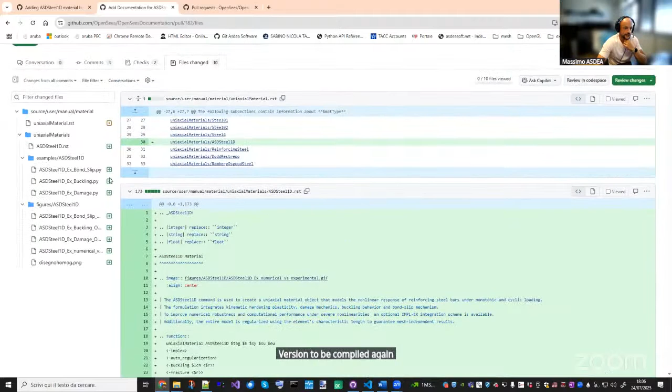So if you want to start using it, on Monday you will have the newest unofficial OpenSees version, the new STKO version, and the recordings for this webinar and the files that Alessia will share with us today. Okay, so I stop sharing my screen. So remember, everything will be ready on Monday with the new version of STKO. So I stop sharing.

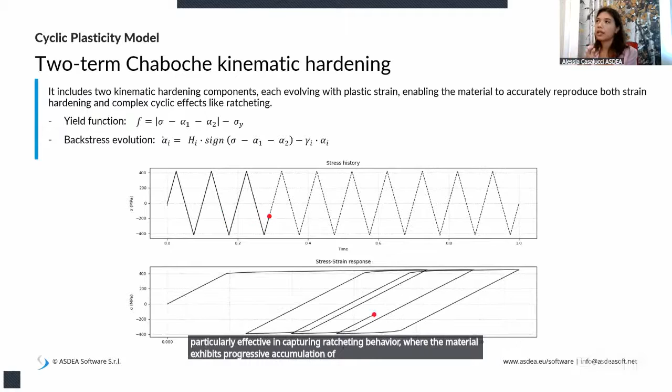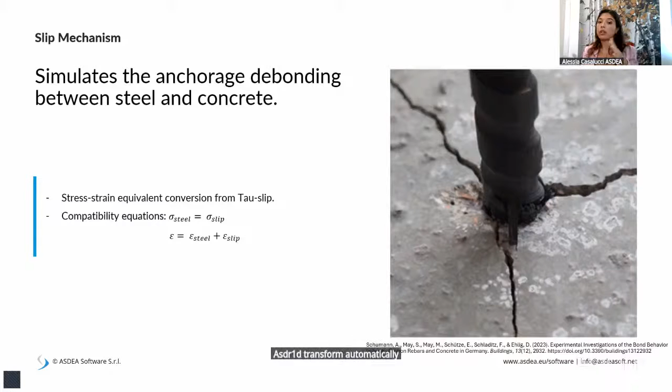Another important mechanism is the bond slip interaction between the rebar and the surrounding concrete. In our model, the user can choose any external uniaxial material to define the bond slip law, usually as a tau-slip curve. Internally, ASDSteel1D automatically transforms this into a stress-strain curve and connects the steel and the bond slip materials in series. This ensures stress continuity and strain compatibility.

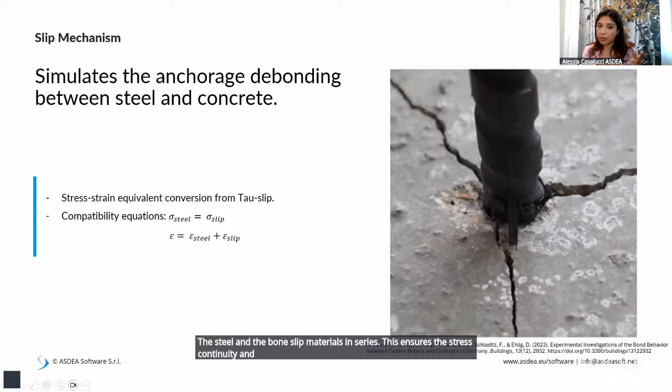Finally, we implemented an IMPL-EX integration scheme, a hybrid algorithm that combines an explicit prediction step and an implicit correction step. This scheme is especially useful when dealing with highly nonlinear behavior, such as softening, slip, or large strains. It improves both stability and convergence, especially in cyclic simulations.

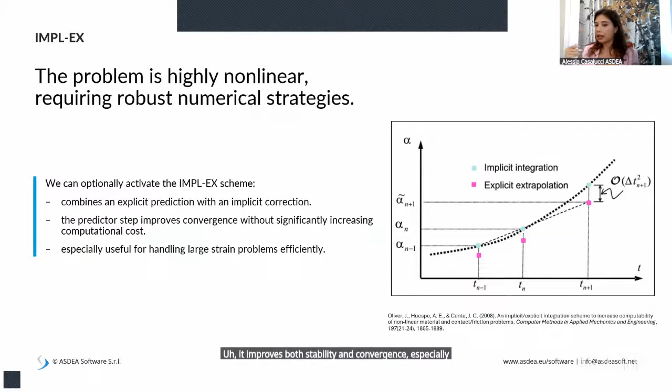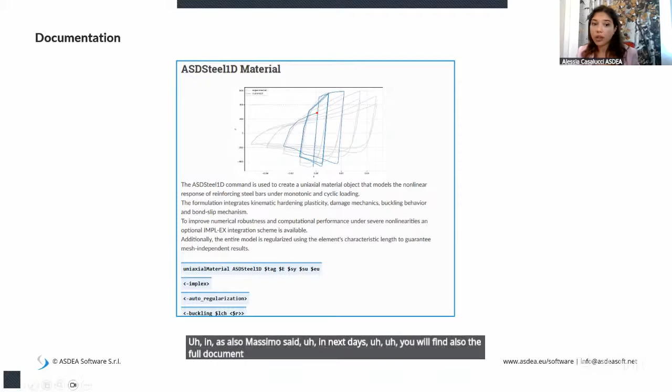As Massimo also said, in the next days you will find the full documentation. I'll show you how it will appear. It includes a brief description of the model, then the full OpenSees command syntax, a list of all the parameters and their meaning, and then a bit of the underlying theory.

If you go down, you can find the notes with the available response types, and finally a set of examples. For each example, you will find a Python script that you can download, and this script runs a complete simulation in OpenSeesPy and produces the results that you can see here. So

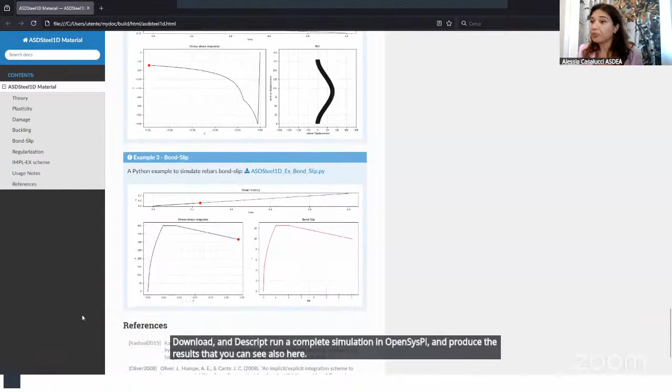now we can move on and I can talk about how to test and define the material parameters. Let me open STKO. Yes, I think it's that. As you can see here, there is no geometry involved. We are just focusing on defining the material itself so that I can walk you through the parameter setup. When you create a new ASD model, this is what you'll typically see.

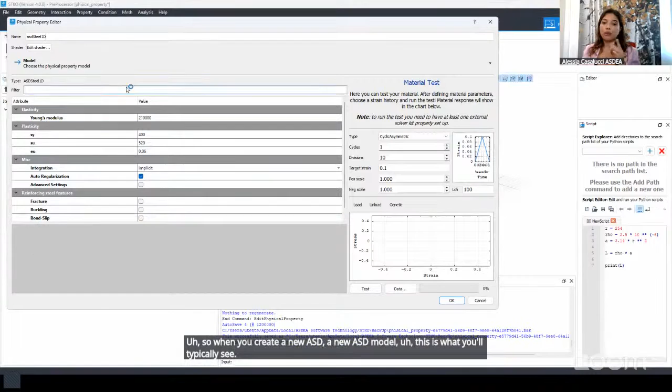First, you define the elasticity section. Here you can input the Young modulus. Then in this section, you can set the yield stress, the ultimate stress, and also the ultimate strain, which control the plastic and failure behavior of the steel. It is important to note that the stress values, both yield and ultimate, can be given in any consistent unit you want, such as megapascal, pascal, or even psi. The key point is that all the parameters must be in consistent units.

So, for example, if you give the stress in megapascal, the Young modulus should also be in megapascal, and similarly geometrical quantities such as bar length or diameter should be expressed in millimeters, or in meters if you're using pascal. In this example, all the parameters are set in megapascal for stresses, and in millimeters, as we can see later, for the length and radius.

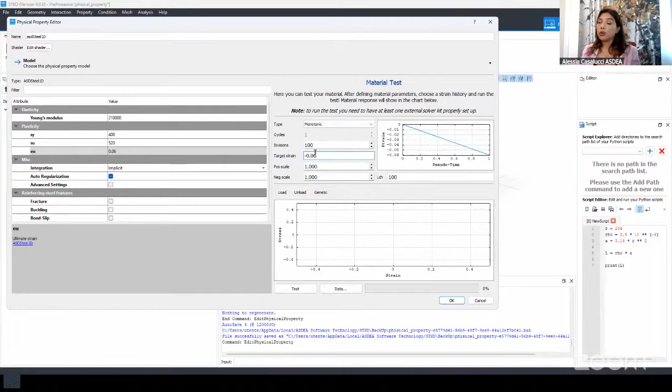So now let's test and show you how it looks. For example, I'm running a monotonic test, and I've set the target strain to 0.06, positive, which corresponds to the ultimate strain that I have defined in the material parameters.

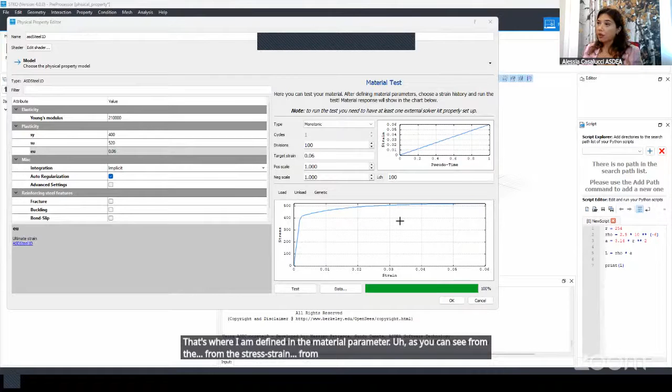As you can see from the stress-strain plot below, the material response starts off linearly, following the elastic behavior up to yield. After yielding at a value of 400 megapascal, we enter the plastic regime, where the material continues to deform, but with reduced stiffness. Eventually, the curve flattens out as it approaches the ultimate stress of 520 and the ultimate strain of 0.06.

So this is the shape in tension. Now let's switch to compression. So I change the target strain from positive to negative, and we use the same material parameters. As you can see in the plot, the shape is perfectly symmetric with respect to the origin, because we haven't yet activated any asymmetry-inducing mechanism like buckling or damage.

This default behavior is what you'd expect for an idealized bar with the same properties in tension and compression, which gives us a clean baseline. But of course, real bars behave very differently once you start to add mechanisms that actually govern their failure. So let's take the next step and switch those mechanisms on one at a time, so you can see how the curve evolves. So first, I'll pick the fracture box.

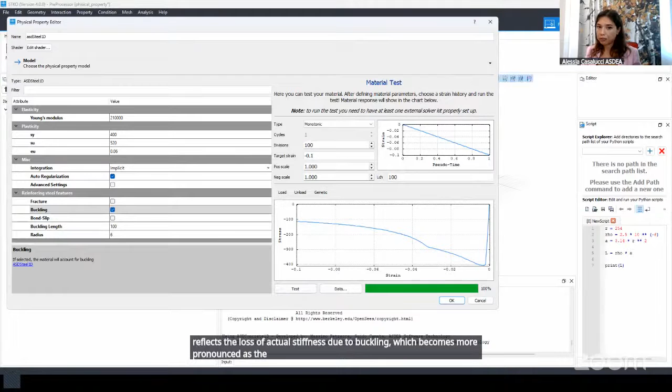Now let's move to the final mechanism, that is the bond slip. As I mentioned earlier, this is essential when simulating the interface between the steel bar and the surrounding concrete. Just like with fracture and buckling, it's also necessary to provide the radius of the bar, since it determines the effective bond area and affects the slip to stress conversion. And then you have to link an external uniaxial material that represents the slip law.

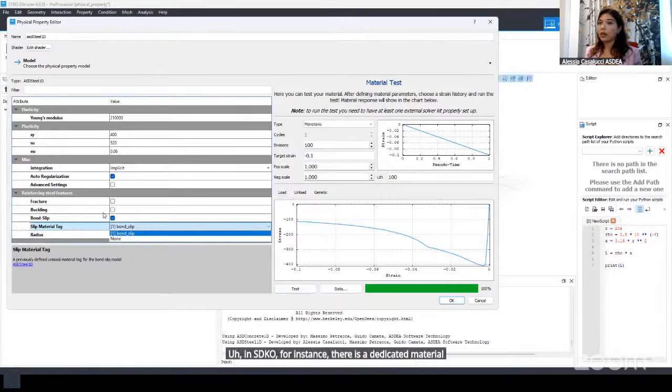In STKO, for instance, there is a dedicated material called ASD bond slip, which simplifies this process. It simulates this mechanism by placing 3 concrete materials in parallel, effectively reproducing the typical slip curve, as you can see here. So I link this material here, and I change the target strain. As a result, the overall stress strain response is now modified. After reaching a peak, it drops and then stabilizes at a residual value, showing the gradual loss of load transfer due to interface degradation.

Now that we have tested fracture, buckling, and bond slip, let's take a moment to talk about auto-regularization. You might have noticed that this option is automatically enabled. However, this is not at all mandatory. The user has full control over whether or not to apply regularization. If you keep the checkbox ticked, the material response will be automatically regularized. We won't go into the internal details of how the regularization is implemented for fracture, buckling, and bond slip, because each of them has its own formulation.

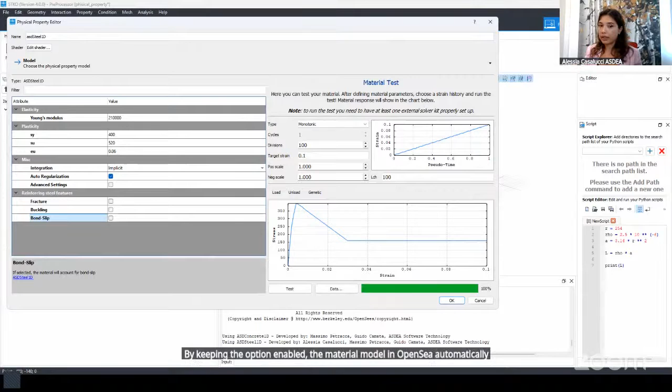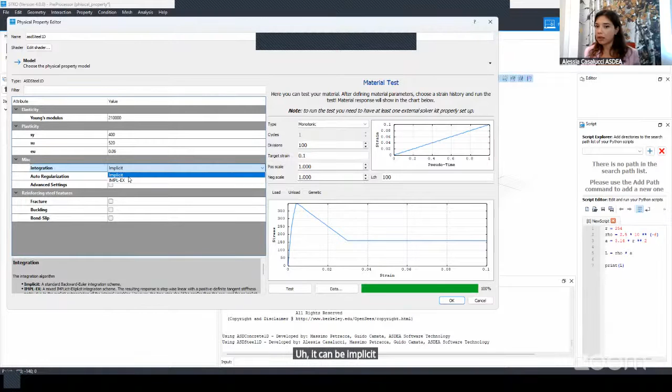What is important here is that by keeping the option enabled, the material model in OpenSees automatically handles the regularization. But again, it's completely up to you. If you don't want any regularization and prefer a purely local response, you can simply uncheck the box. Then you have the integration scheme. It can be implicit or IMPL-EX. You may already know the difference between them.

Below that, you have a few additional parameters. These are part of the advanced settings, and they are all optional. Most of the time, the default values work well. I tick the box only to show you. We have K alpha, which defines the weight between the consistent elastoplastic tangent and the purely elastic modulus. A value of 1 gives you the full consistent tangent, while 0 uses only the elastic modulus. Then we have max iter, the maximum number of iterations allowed in the Newton-Raphson loop used by the representative volume element. The default value is 100, which is usually sufficient for convergence.

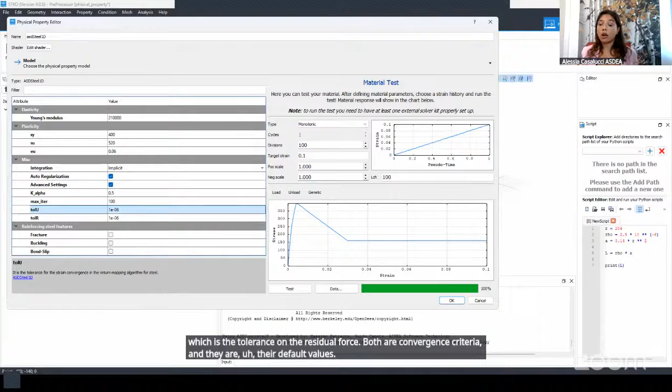The two final parameters are tol u, the tolerance on the displacement increment, and tol r, the tolerance on the residual force. Both are convergence criteria, and their default values are 10 to the power of -6, which is quite strict, but necessary for accurate simulation. So unless you are dealing with particularly difficult cases or numerical issues, you usually don't need to change these.

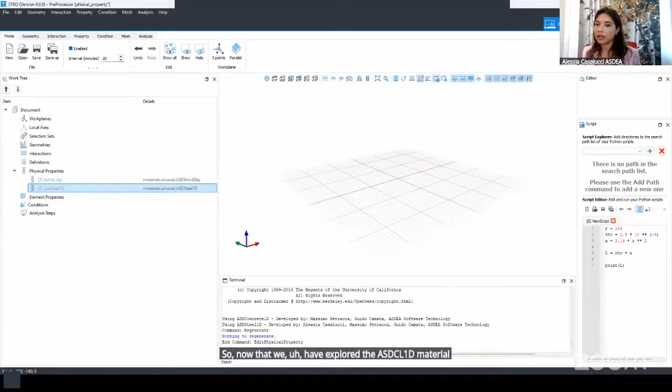So now that we have explored the ASDSteel1D material and tested its key feature, we can move on to a more practical application: replicating a real experimental test. This part of the webinar is based on the study of Brown, Lehman, and Stanton, which aimed to capture bar buckling in reinforced concrete bridge columns, and you can find it in PEER report 2007-11.

In this slide, you're seeing a summary of the main aspects we need to define to build our simulation model. We'll follow these key steps one by one. In this example, we aim to simulate an experimental test in which a reinforced concrete column is subjected to an axial load and an increasing cyclic lateral displacement.

To replicate this behavior in STKO, we start by defining the geometry of the column based on dimensions reported in the experimental setup. Next, we assign the material properties, concrete for the cover and the core, and ASDSteel1D for the reinforcing bars. And we then move on to element selection. In this case, the column is modeled as a line element to which we assign a fiber section.

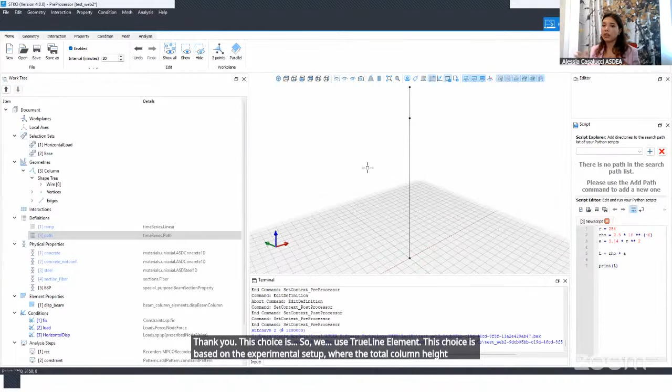This choice is based on the experimental setup, where the total column height is approximately 1,719 millimeters, and the horizontal cyclic load is applied at 1,524 millimeters from the base. So by dividing the column into two lines, we ensure that there is an intermediate node exactly at the loading point, which will be useful for applying the lateral displacement. These lines are then joined, as you can see here, using a wire to define the continuous geometry of the column. Now let's define the physical properties of the section.

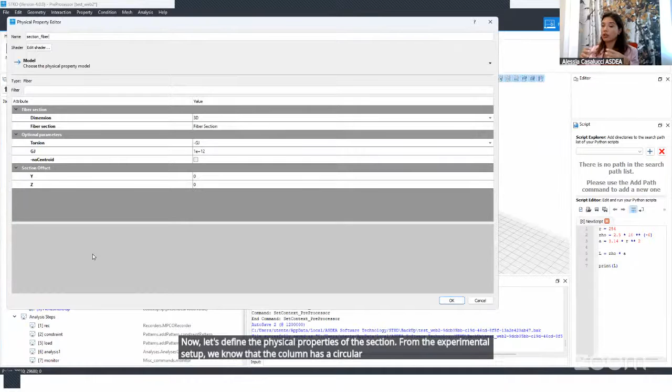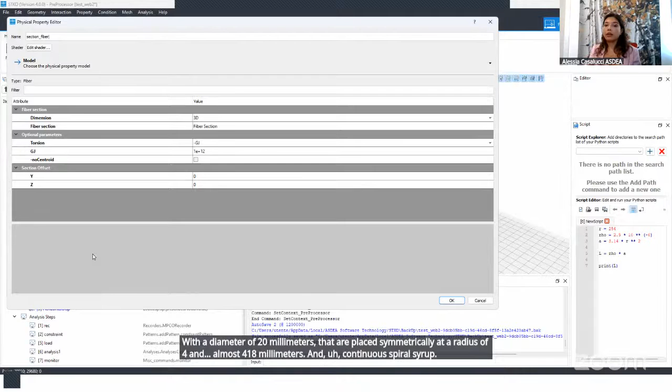From the experimental setup, we know that the column has a circular cross-section with a radius of almost 500 millimeters, 10 reinforcing bars, each with a diameter of 20 millimeters, placed symmetrically at a radius of 418 millimeters, and a continuous spiral stirrup that provides the confinement. This led us to divide the concrete into two zones: the outer part, which is the unconfined concrete, and the core, which is the confined concrete, due to the lateral pressure exerted by the spiral.

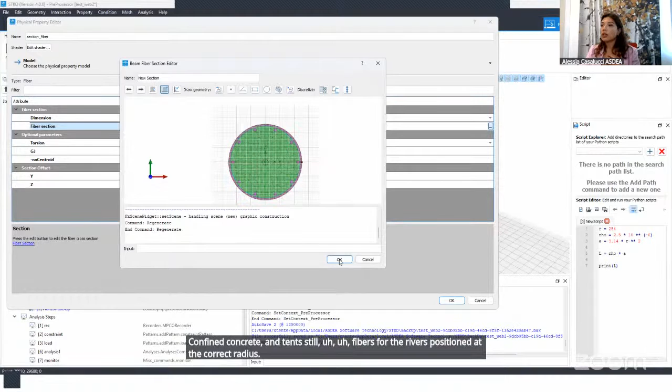So in STKO, we use a fiber section, and in particular, the section includes the two concrete zones. The violet one represents the unconfined concrete, while the green zone is filled with confined concrete, and 10 steel fibers for the rebars positioned at the correct radius. In addition, since we are assigning this fiber section to a line element, we need to define a torsional rigidity that has been estimated from physical and geometrical data from the test.

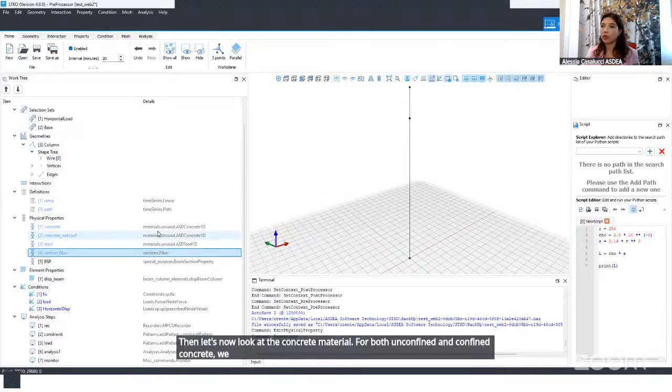Then let's now look at the concrete material. For both unconfined and confined concrete, we use the ASDConcrete1D. For the unconfined concrete used for the outer region, the key material parameters, the compressive strength and the Young modulus, are taken directly from the PEER documentation, while the remaining parameters are computed following empirical relationships. In particular, the tensile strength is assumed to be 1/10 of the compressive strength.

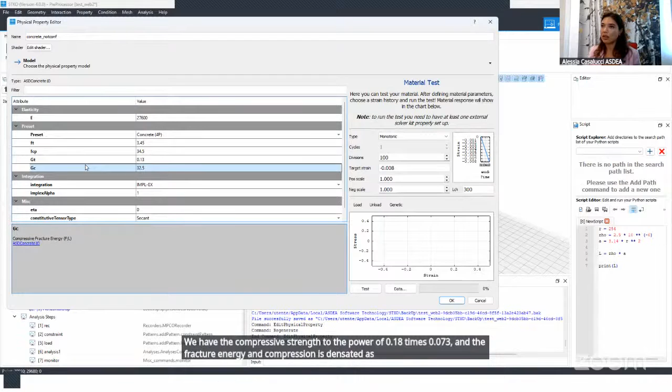The fracture energy in tension is calculated using the empirical formula 0.073 times the compressive strength to the power of 0.18, and the fracture energy in compression is then set as 250 times the tensile fracture energy. These relationships are commonly used in literature to calibrate concrete softening behavior when direct experimental values are not available.

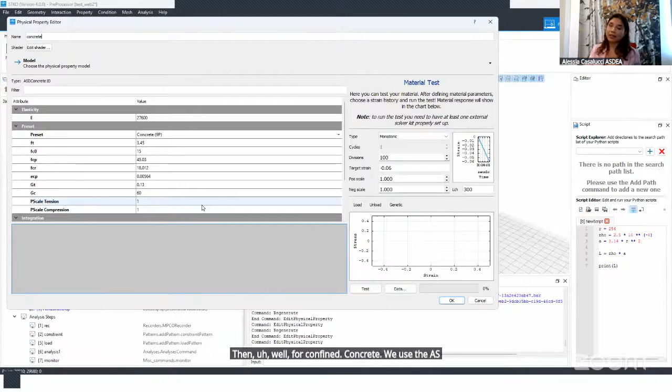Then, for the confined concrete, we use the ASDConcrete1D model with a 9-point formulation. This model allows us to represent nonlinear behavior under both compression and tension, including softening and fracture. To determine the peak compressive strength and the respective strain, we apply the Mander formula, which relates the confined and the unconfined compressive strength through the lateral confining pressure generated by the spiral stirrups. This calculation helps ensure that the behavior of the inner core is realistically represented.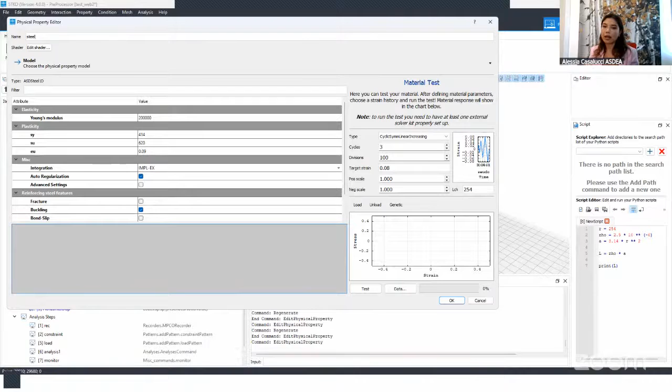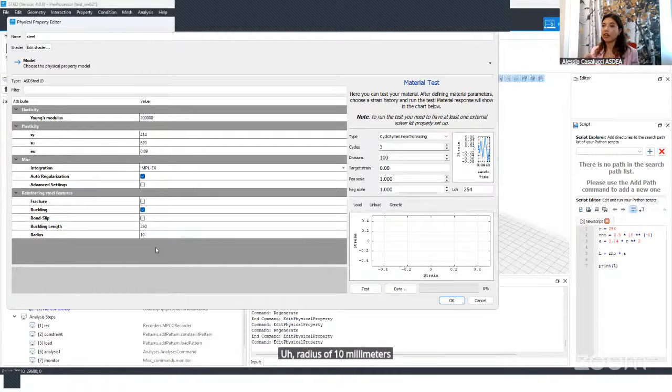Next, we define the material for the steel rebars using the ASDSteel1D model. All the mechanical properties, the yield strength, ultimate strain, and the Young modulus, are taken from the experimental report. Additionally, we activate one key feature, the buckling, by assigning a radius of 10 millimeters and an effective buckling length derived from the test data.

Finally, we wrap everything together by creating beam section properties, where we assign the fiber section here and set the number of integration points to 5. And we assign it, as you can see here, to the entire geometry.

We then define the element properties for the column. In this case, we use the displacement beam column, which is particularly suited for nonlinear analysis. In this property editor, we set the dimension to 3D, and the transformation type is set to linear. And we also assign it to the entire geometry.

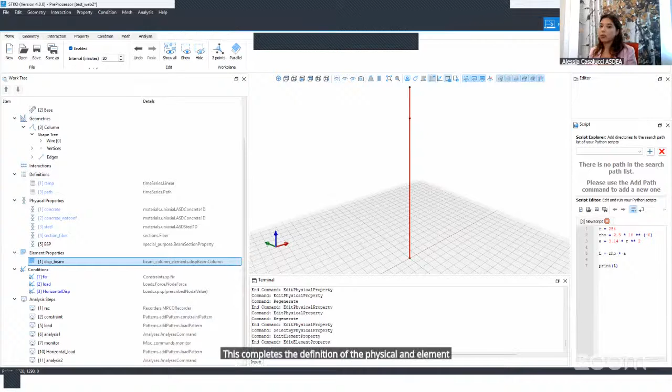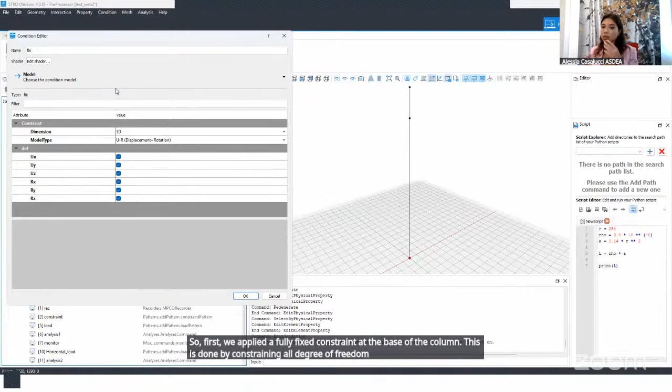This completes the definition of the physical and element property that will be assigned to the beam column element representing the concrete column. Now let's move on to the boundary condition and loading definition. So first, we applied a fully fixed constraint at the base of the column. This is done by constraining all degrees of freedom, translation in X, Y, and Z, as well as rotation around the X, Y, and Z axis. This replicates the experimental setup where the column is firmly anchored to the ground to prevent any movement or rotation at its base.

Second, we applied a constant vertical load at the top of the column to simulate the effect of the permanent axial load. This vertical load is directed along the negative Z axis with a magnitude calculated based on the axial stress applied in the experiment.

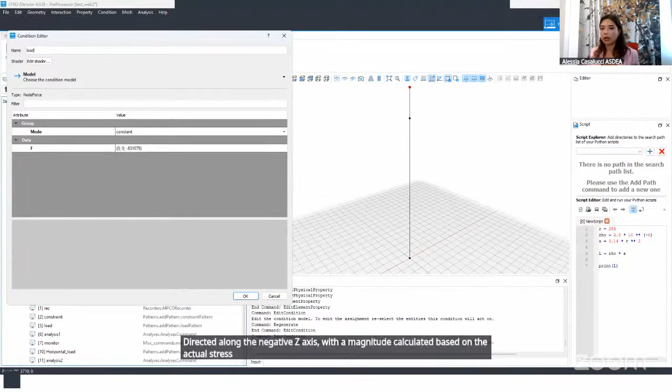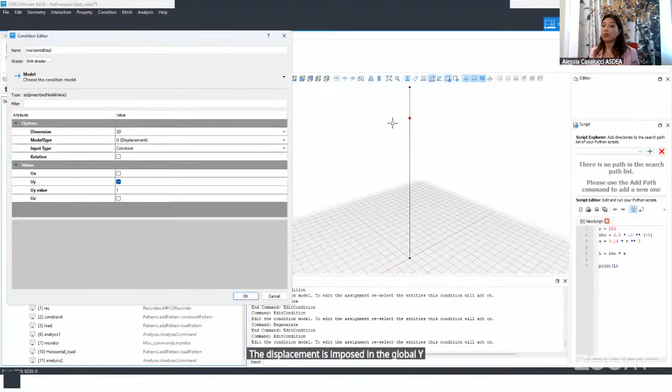And finally, to simulate the cyclic lateral loading, we prescribed a horizontal displacement as the control load here, that is located at a height of almost 1015 millimeters from the base. The displacement is imposed in the global Y direction with a unit amplitude of 1. And this unit amplitude is then scaled over time using a path time series. This path replicates the displacement history applied in this experimental test and has been regularized.

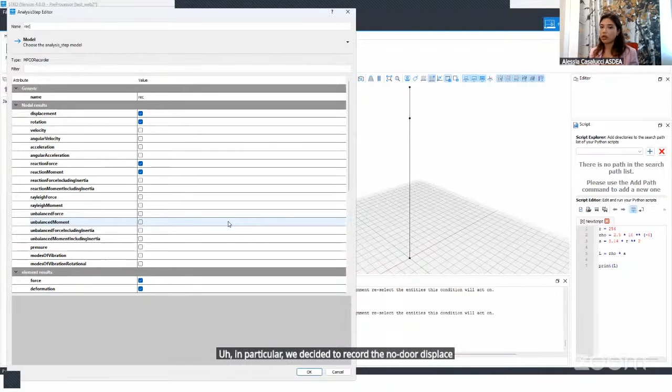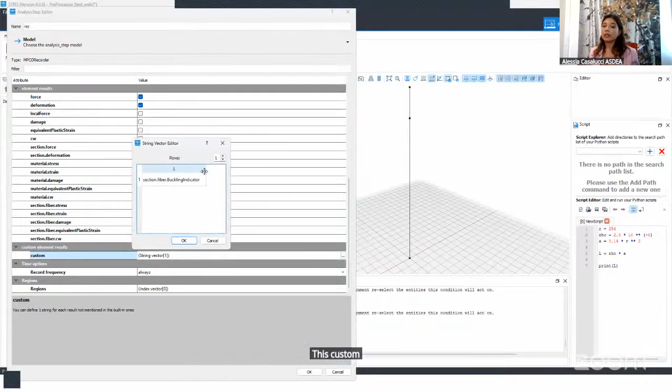Now that all the boundary condition and loading definitions are in place, let's take a look at the analysis steps used to simulate the response of the column. We begin by setting up the recorder to extract key output quantities during the simulation. In particular, we decided to record the nodal displacement, rotation, reaction force, and moment, essential to evaluate the global response of the structure. Additionally, at the fiber level, we record the strain, stress, and as you can see here, the buckling indicator. This custom output provides deep insight into the local material behavior within the fiber section.

After that, we define the constraint pattern. As can be seen, we apply a single point constraint, which fully fixes the base node. Then we define the vertical load, which simulates the sustained axial force acting on the top of the column. In this first analysis step phase, the time series is linear, meaning the vertical load is applied gradually, but then remains unchanged throughout the analysis.

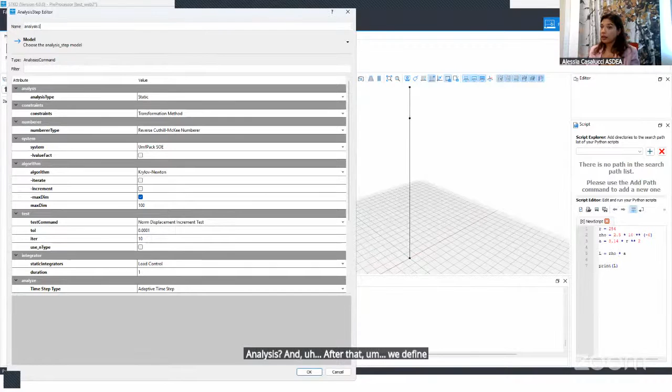And after that, we define a standard static analysis. Anything special here? All the setup for static analysis. We have a load control integrator with a duration of 1 because it should match the total duration of the time series. However, we have also enabled the adaptive time stepping, which allows the code to automatically adjust the increment size.

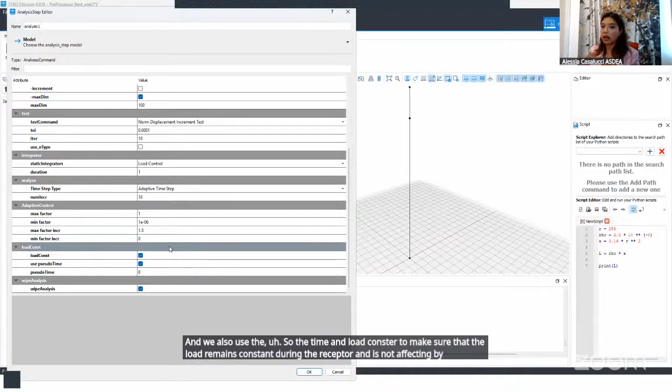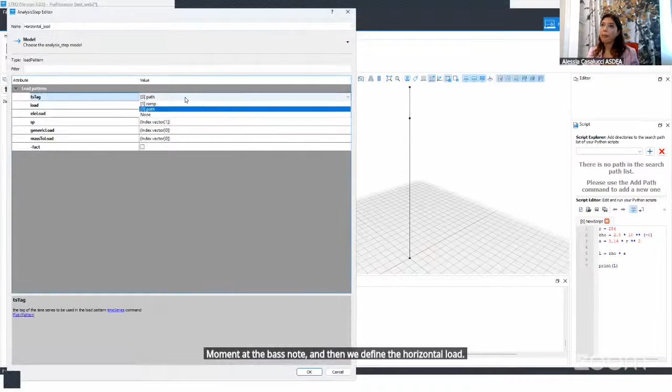And we also use the pseudo time and load const to make sure that the load remains constant during the steps and is not affected by internal time increments. And finally, the wipe analysis. Then we could move to the pushover test. We set a monitor to check the reaction moment at the base node, and then we define the horizontal load with the path time series. And finally, the analysis that is set almost as the previous, it's a load control analysis with the adaptive time step.

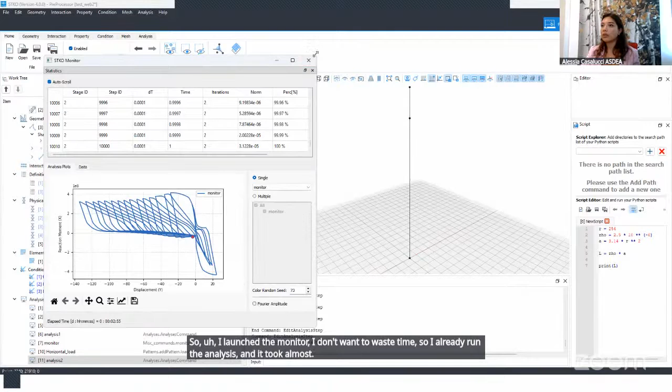So now if you run this model, we will obtain the result that I'm showing you. So I launched the monitor. I don't want to waste time, so I already ran the analysis, and it took almost 3 minutes to run the entire analysis of 10,000 time steps. And in this plot, you can see the moment displacement that corresponds to the lateral movement in Y response at the base node of the column.

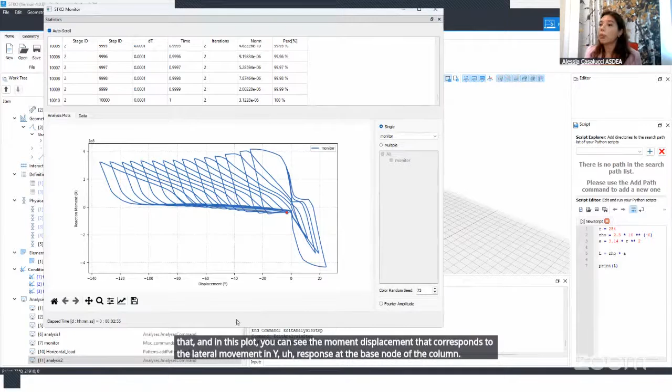For comparison, I show you here, maybe it's better if I reduce this one, okay. Here on the right side, you can see the experimental moment drift of the specimen CT5 from the PEER 2007-11 report. Please note that the experimental curve appears mirrored with respect to the simulated one, but this is irrelevant from a physical standpoint, as it simply depends on the orientation of the Y axis in the coordinate system.

Also, keep in mind that the units are different between the numerical simulation and the experimental data. In the simulation, the moment is expressed in Newton millimeters and the displacement in millimeters, while in the experimental plot, the moment is in kip inches and the displacement is in inches.

To give a raw comparison, 1 kip inch is almost 113,000 Newton millimeters, and 1 inch is almost 25 millimeters. So for example, an experimental moment of 4,000 kip inches corresponds to approximately 4 times 10 to the power 8 Newton millimeters, which is on the same order of magnitude as our peak simulated reaction moment.

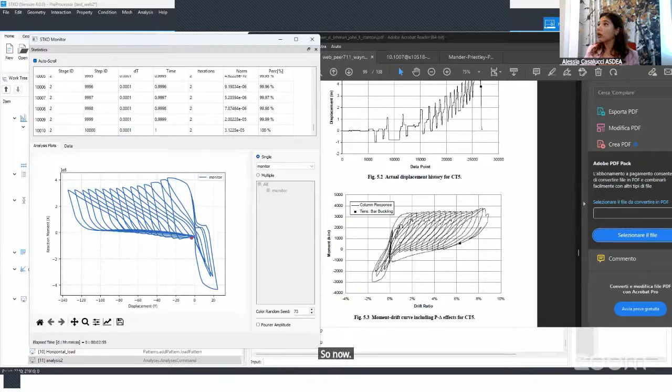So now I can go to the post-process here. And I'm going to show you the dynamic response of the column throughout the entire loading protocol. Here you can see the lateral displacement developing under cyclic loading. The deformation is amplified by a factor of 5 to better visualize the global response.

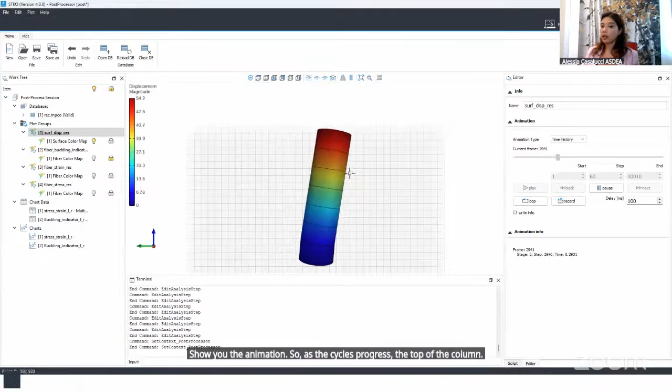Let me show you the animation. So as the cycle progresses, the top of the column undergoes increasing lateral drift, while the base remains fixed, and this visualization highlights the accumulation of displacement and gives a clear picture of the overall deformation shape.

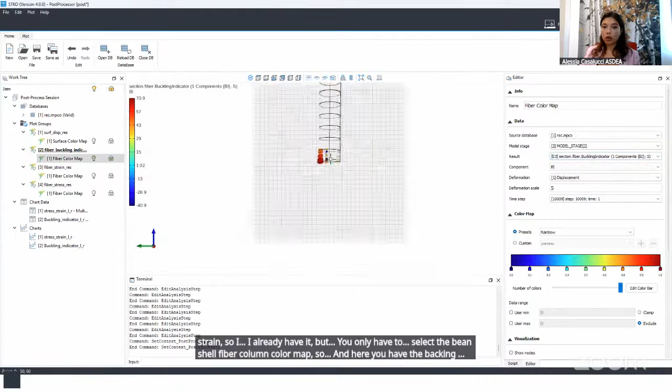Then I show you a sequence of fiber level results for different internal quantities. First the buckling indicator, and then stress and strain. I already have it, but you only have to select the beam shell fiber color map. And here you have the buckling indicator. The buckling indicator represents the lateral displacement of the steel bars, and I displayed it by selecting only the steel material because the concrete does not have the buckling indicator as a response.

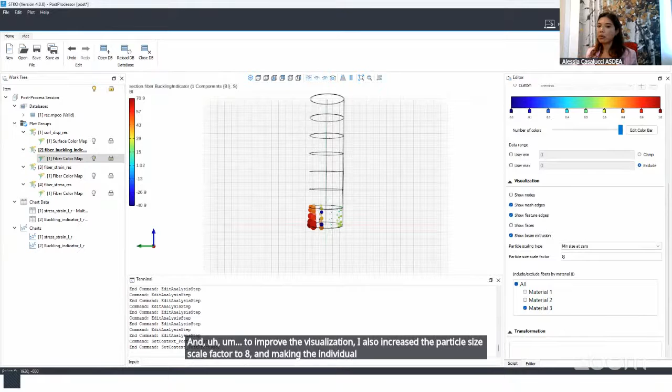To improve the visualization, I also increased the particle size scale factor to 8, making the individual fibers more visible. Additionally, the deformation scale is set to 5 to enhance the perception of curvature and buckling effects. This animation illustrates how bar buckling initiates and progressively intensifies during the loading cycles.

Lateral displacements are most pronounced in the compressive region near the column base, where plastic deformation accumulates. Overall, this fiber level visualization allows us to monitor the evolution of the local buckling phenomena and to link them with the global deformation demand.

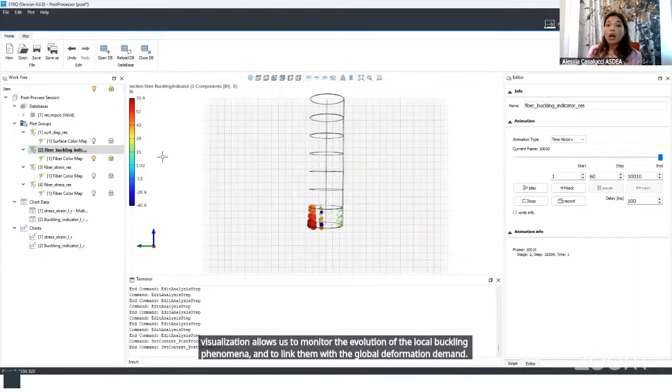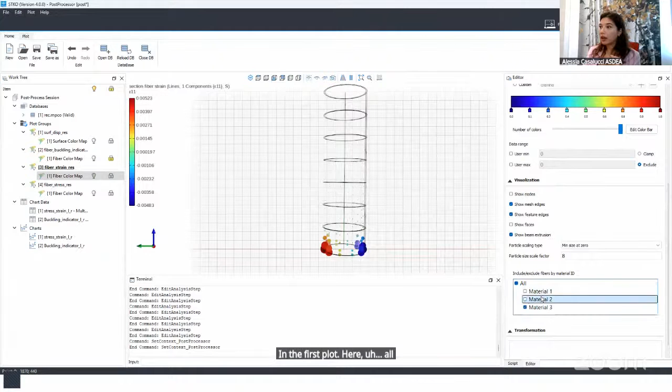Now I present a sequence of strain visualizations at the fiber level, shown progressively by filtering the materials involved in the section. In the first plot here, all the materials are included: the unconfined concrete, the confined core concrete, and also the longitudinal reinforcement. This provides a comprehensive view of the overall strain distribution in the section during the entire loading history.

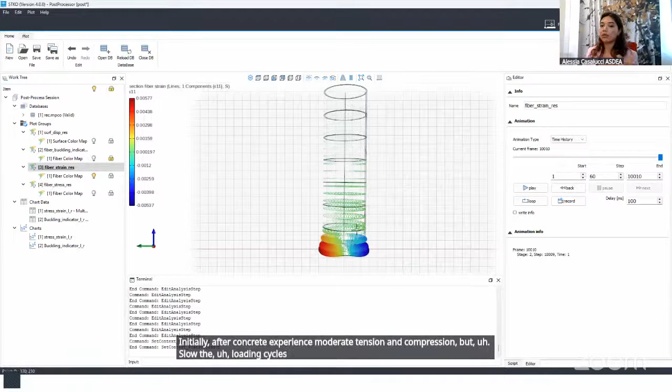You can observe how strains start to accumulate progressively with increasing lateral drift. Initially, the outer concrete experiences moderate tension and compression, but as loading cycles intensify, both steel and core concrete develop significant plastic deformation. This global view is useful to understand the interaction between materials and how strain localizes in different regions of the section.

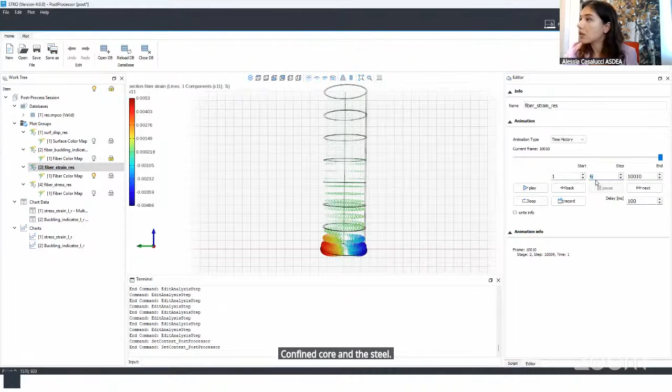Then I hide the unconfined concrete, allowing us to better isolate and visualize the response of the confined core and the steel. You can now see more clearly how the confined core concrete helps limit strain concentration in the early cycles. However, as the number of cycles increases, the strain in the confined region begins to localize, especially near the base, indicating the formation of a plastic hinge.

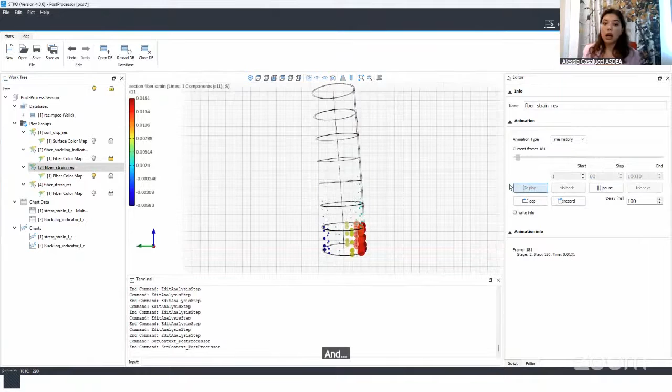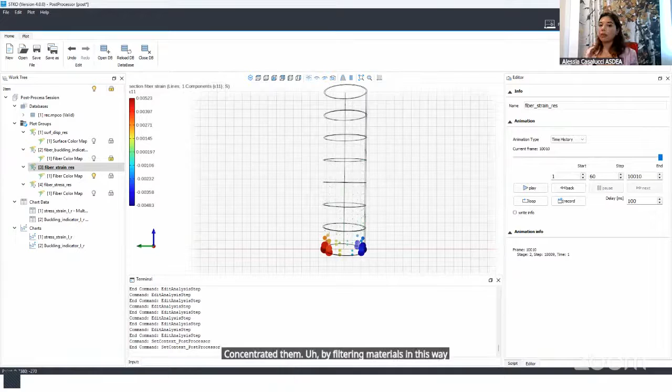Finally, I show you the strain distribution only in the steel fibers. This clearly reveals the development of the plastic hinge and the progressive accumulation of inelastic strain in the longitudinal reinforcement, especially near the base, where bar yielding and cyclic degradation are most concentrated. By filtering materials in this way, we can better interpret the contribution of each component to the section's overall behavior.

Now I pass to analyze the stress distribution at fiber level, also in this case filtered by material type to progressively highlight the contribution of each component to the section behavior during cyclic loading. So firstly, all the materials are included, so unconfined concrete and steel.

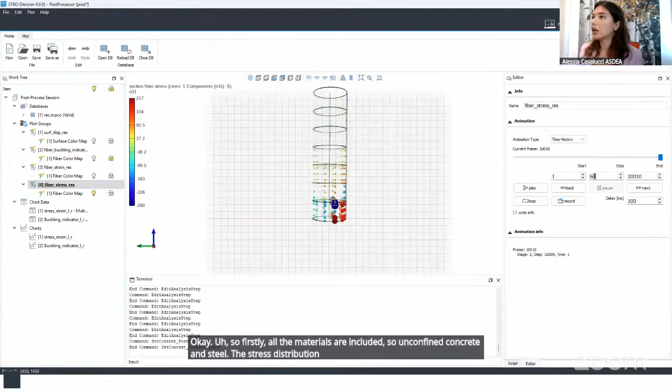The stress distribution evolves during the cycle with alternating compressive and tensile stresses depending on the curvature. And you can clearly see how concrete and steel share the loads in the early stage and how stress progressively concentrates in the core and the reinforcement. In fact, if I look at the unconfined concrete here, you could... okay, I checked.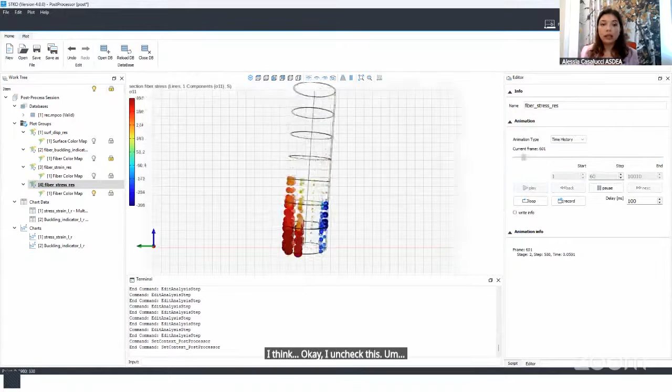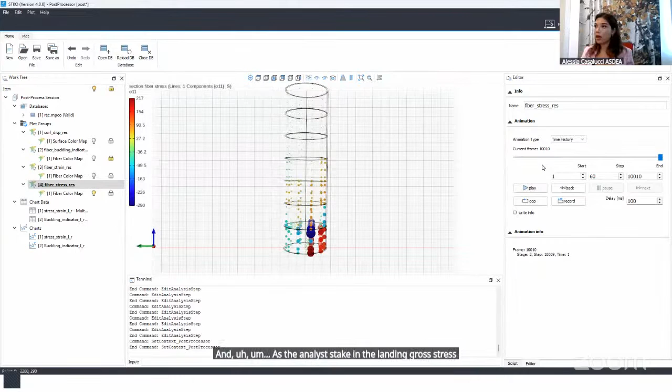Okay, we could focus on the confined core and longitudinal reinforcement. The stress in confined concrete remains stable for the initial cycles, and as the inelastic demand grows, stress redistribution becomes evident. I'll show you again, especially in the central core and in the bars, with large tensile stresses on one side and compressive stress on the opposite side.

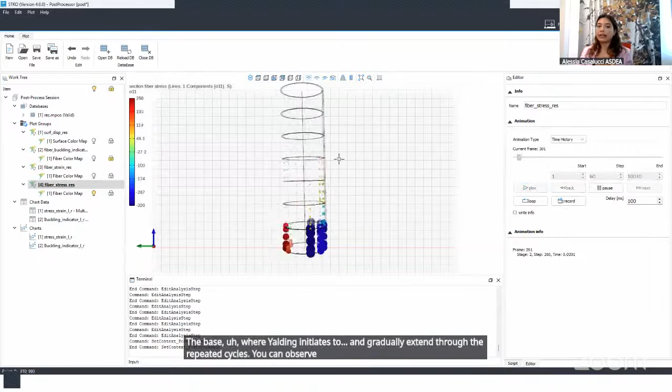Finally, I isolate the steel. Okay, to visualize the internal forces in the longitudinal reinforcement, the stress levels reach their peak values near the base, where yielding initiates and gradually extends through the repeated cycles. You can observe the alternating tension and compression in the bar, as well as residual accumulation due to cyclic plasticity. This detailed stress map confirmed the accuracy of the implemented steel material model in reproducing cyclic hardening and degradation.

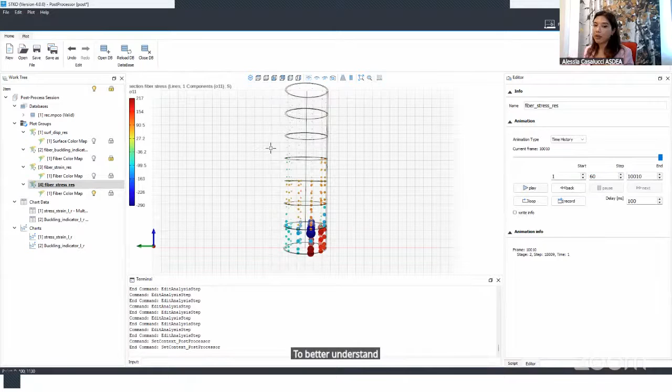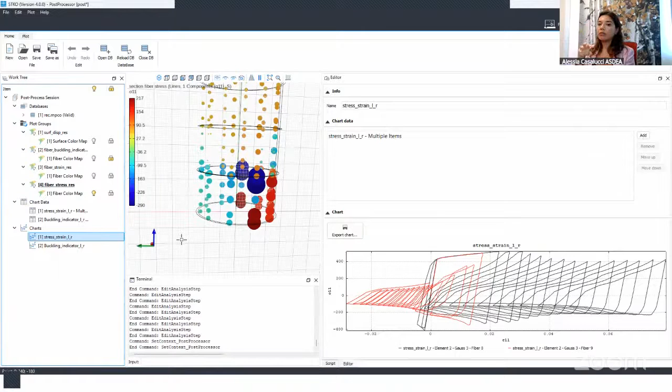To better understand the local steel behavior under cyclic loading, I selected two specific steel fibers located at the extreme edges of the section. Particularly, I selected this one and this one on the other side. These fibers are positioned symmetrically with respect to the section centroid and are representative of the maximum tensile and compressive demand at the base of the column where the plastic hinge developed. Here you can see the stress-strain plot for each fiber, plotted over the entire loading history.

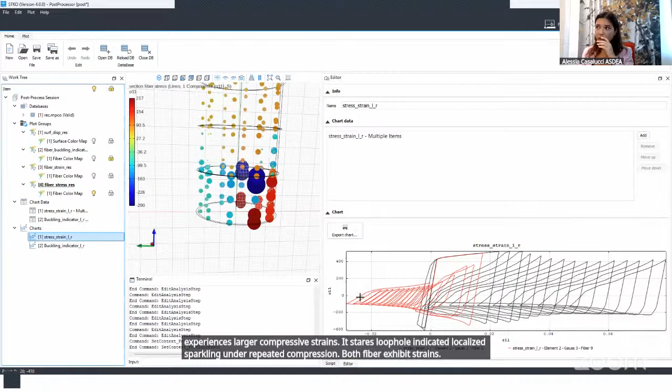Fiber 9, the red curve, initially in tension, undergoes yielding and strain hardening, followed by unloading and reloading into compression. The loops display the residual strain and a change in slope, which are characteristic of cyclic plasticity, while fiber 0, represented by the black curve, on the opposite side, experiences large compressive strains. Its hysteresis loop indicates localized buckling under repeated compression. Both fibers exhibit strain values that reach almost 0.04, confirming that they undergo significant plastic deformation.

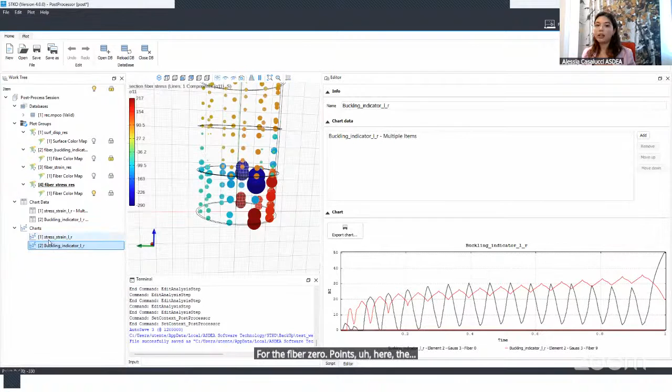Conversely, fiber 9, mostly in tension, maintains negligible buckling indicator values throughout the loading cycle, as we expect. By comparing the stress-strain curve and the buckling indicator time history, a clear correlation emerged. The growth of the buckling indicator for fiber 0, here the black line, coincides with increased compressive strain and cyclic degradation, supporting the interpretation of local instability.

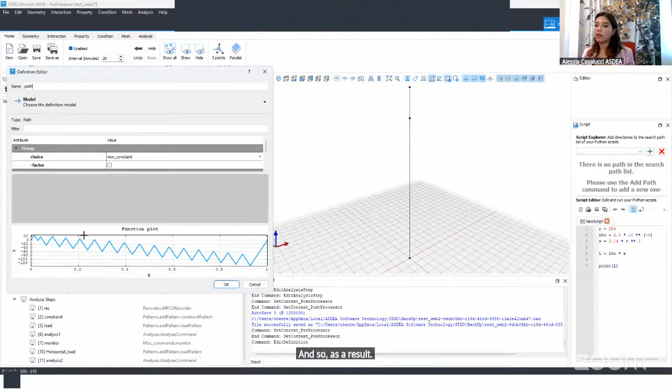Moreover, the amplitude of the response differs between the two fibers. This is because we applied a loading path, that I show you here, that is not symmetric at all with respect to tension and compression, and it is biased toward compression, leading to more severe inelastic demands on the compressive side. As a result, fiber 0 undergoes larger deformation and instability compared to fiber 9, despite, as you can again see here, their symmetric position in the section.

So to conclude very rapidly, ASDSteel1D is a uniaxial material model that brings together a wide range of physical mechanisms relevant to the nonlinear behavior of steel reinforcement, including plasticity, tensile fracture, buckling, and bond slip. What sets it apart is not only the completeness of the formulation, but also the way these phenomena are integrated in a consistent and efficient way. In short, ASDSteel1D offers a good balance between physical realism, numerical robustness, and practical usability.

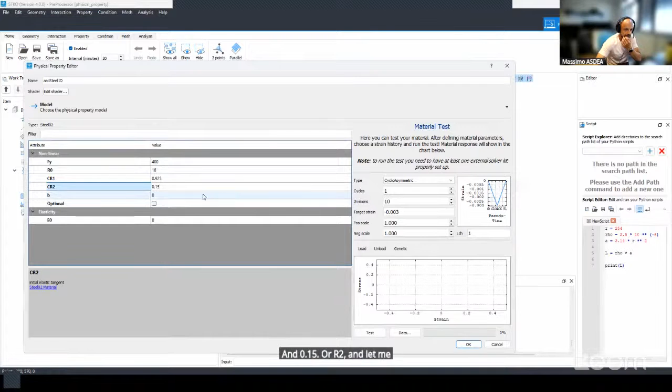You can choose like 18, 18, and then you can choose for CR1 0.925 and 0.15 for CR2. And let me calculate the hardening. So in your model, you need to have 520 at 0.06. So let me do a quick calculation. Divided by approximately, because I'm not interested in getting the exact one.

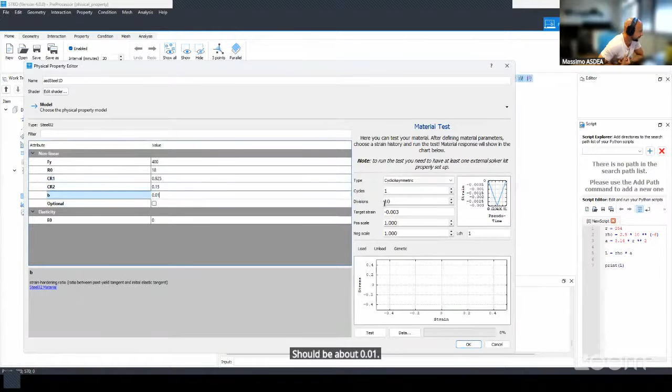It should be about 2000 divided by 200. Should be about 0.01. And E0 should be the Young's modulus. So 200, yeah, exactly. Okay. Now just do a quick cyclic asymmetric linear increasing test. I just want to double check that everything is correctly set. Yes. Few more divisions. Do a test. Okay, that's fine. Press OK.

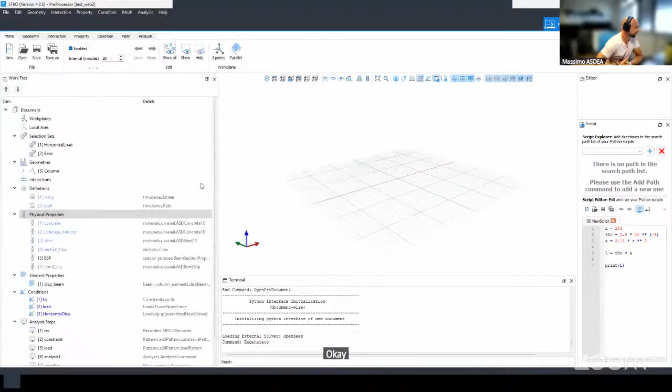Okay, you can press OK now. No, I mean the other one, in the global model. Sorry. So we show people what would be the behavior of a standard steel material without buckling. So save it with another name. Okay, perfect. So you can just change the steel.

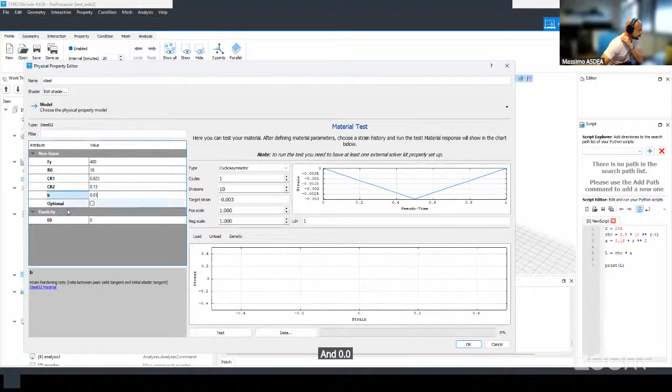Perfect. Steel02. So said 400. Then 18, 18. Then 0.925, 0.15, and 0.01, 210 E3. Okay, and that's it. And you can simply run the analysis and be prepared that now maybe it will take some more iterations because now this model does not have the IMPL-EX. And let's see the behavior in tension.

Okay, this is the initial behavior in tension. As I said, if you want to lower it, this first part is governed by the tensile strength of concrete. So you can reduce the tensile strength and see if you get a better match. Okay, now we can wait a couple of minutes. As you can see now in this area, you will never see the unloading and reloading and recovery of buckling because this model doesn't have buckling. Another thing is that now the unloading branch goes down to zero stress, also because there is no buckling.

But anyway, as you can see here, you will never be able to get the buckling on this model. It takes a little bit longer. Now we are at half of the analysis. We are about 2.3 minutes because this one doesn't have the IMPL-EX model. So it requires more iterations to converge, but it's stable anyway. So yes, it has different advantages.

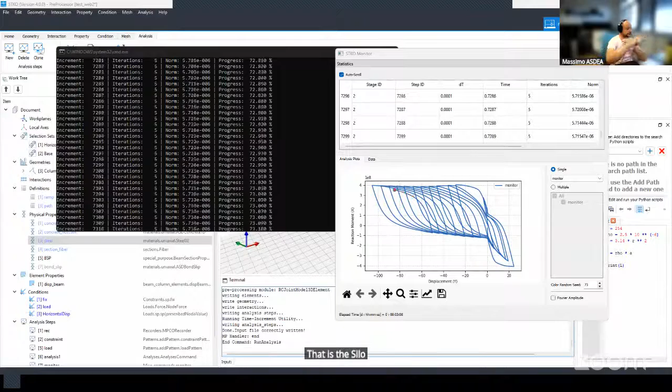And by the way, in this example, Alessia showed only the buckling, but you can activate other features. So you can add the bond slip, you can have the fracture, or if you don't want any of them and just want the robustness of the IMPL-EX, you can simply use the ASDSteel1D, switch off all the features, and it will behave as the Steel02, with a different cyclic behavior, but you get the advantage on convergence.